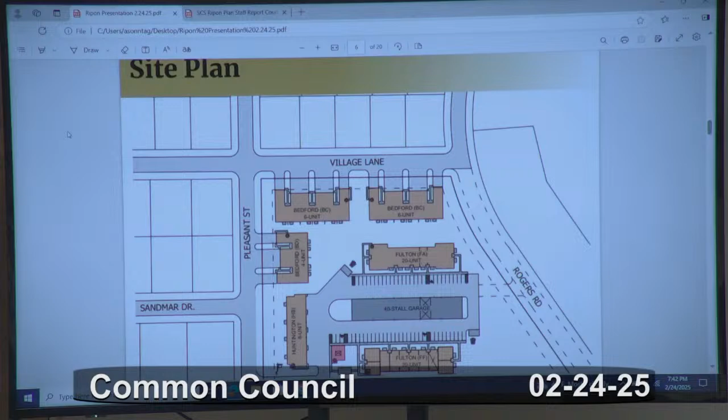To go a little bit more in depth into our site layout, as Courtney stated, we have 3 different building types on the site. Along the public streets, we have our 1-story Bedford building. These buildings have individual driveway access, and each unit will have individual rollout trash services. Our primary entrance to our other multifamily buildings is to the south of our site on Pleasant Street.

As you drive in, you're first greeted with our property management office, which our on-site leasing personnel will be working out of. This office is where tenants can access their mail, and we have included a community patio for tenants to use to the south of that building. Driving into our site to the west is our 2-story Huntington building. As you drive further along, you can see we have 2 of our 2-story Fulton buildings with their designated detached parking stalls in the middle. Our site has been specifically designed to consider snow removal, garbage pickup, and mail delivery.

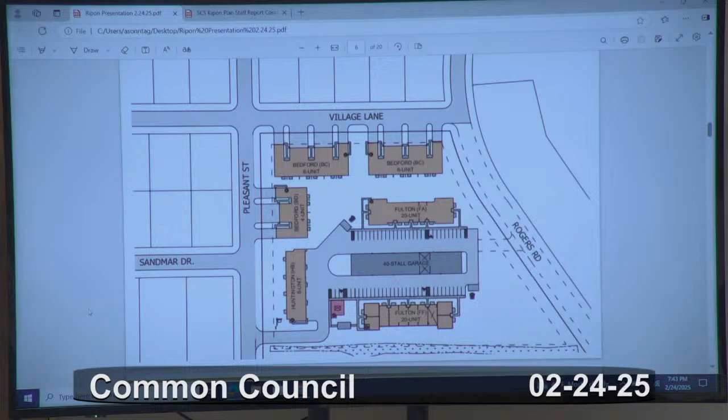Here's a bird's eye rendering of our site. Keep in mind that these renderings are not reflective of our proposed landscaping plan, but these are an accurate representation of our site layout and our building materials that we've selected.

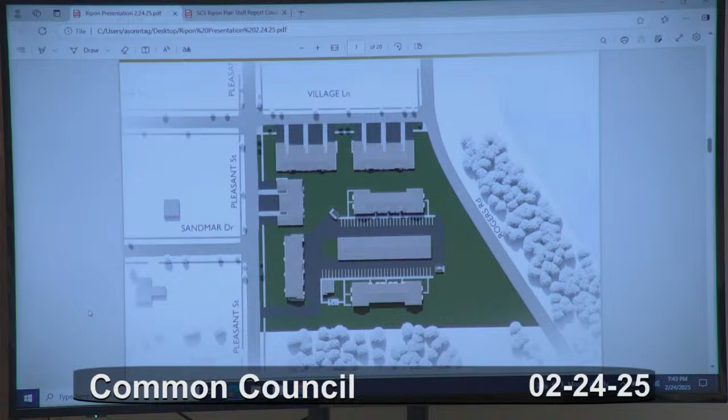Do you want to speak a little more? My understanding is, speaking of landscaping, that there's some more landscaping that makes it look a little bit classier from the road. Do you want to speak to that?

Yeah, we've submitted a landscaping plan, and I believe it's within the packet, but I'll touch on it more later in the presentation. We've included a whole bunch of different types of trees, and we used R3 point values as a baseline to work from, trying to get as many trees and shrubs on the site as possible.

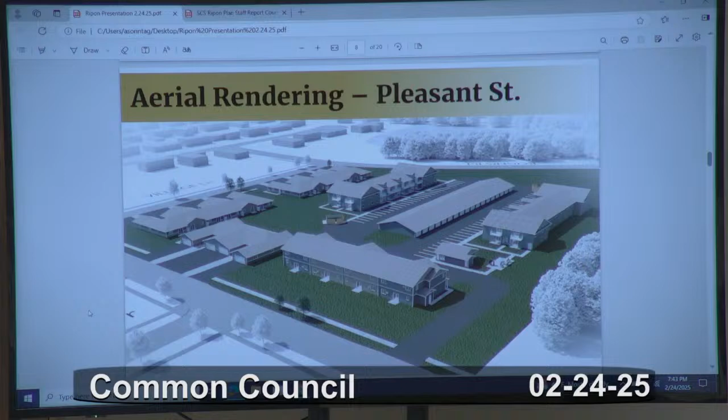Thanks. And then here's a bird's eye rendering from Pleasant Street looking into the site, and below that, here's an aerial view from the intersection of Pleasant Street and Village Lane.

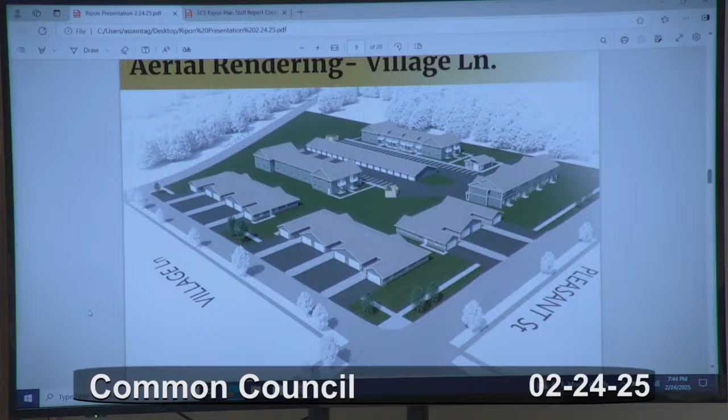And then, as previously mentioned, we've included a community patio area on the site specifically for tenants to use. This amenity has been very popular on some of our previous sites.

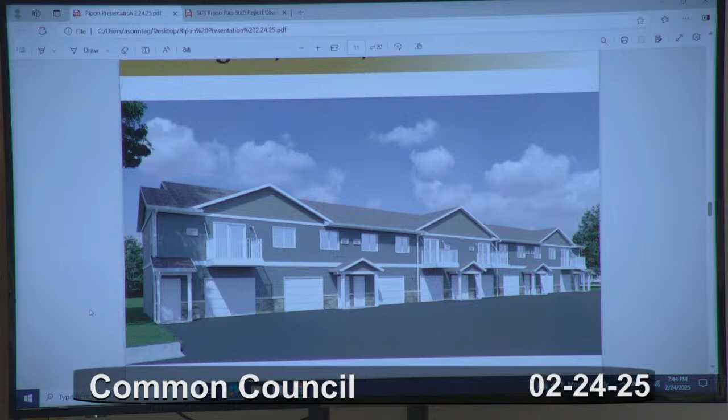To go a little more in depth on the specific buildings we've selected for this site, this is our Huntington building. We have one of these. It's 2 stories tall with a total of 8 units, all 2 bedrooms. This and all of our units on site include private entrances and in-unit laundry, but these units also include stainless steel appliances, an attached single-car garage, and a variety of floor plans, including upper units and townhome style units.

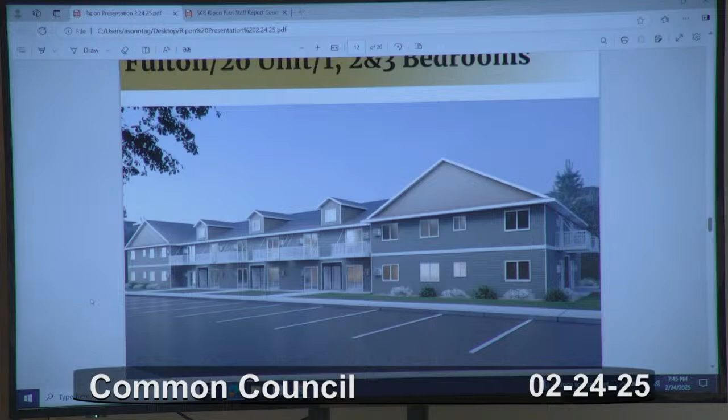This is our Fulton building. We have 2 of these on site. It's 2 stories tall with 20 units ranging from 1, 2, and 3 bedrooms. These units have single-story living, so you're either on the first or second story. Each unit includes its own balcony or patio area, and these units are offered at a lower price point compared to the other buildings because they have a detached single-car garage instead of attached.

Our leasing teams are highly experienced and professionally trained, so all rental applicants go through a comprehensive screening process, offering peace of mind that your neighbors went through the same income, background, and credit review process that you did. SCS also offers many online conveniences, which are very popular these days, such as virtual tours, online payments, and maintenance requests.

Thank you again for allowing us to share the proposed SES Ripon project with you tonight. The housing development would be a perfect addition to your thriving community. No matter what stage of life you're in, we would have the right apartment for you. With a vacancy rate of under 1%, we are confident in the demand for housing in Ripon and are excited for the opportunity to be a part of the solution. We're here to answer any questions that you may have. Thank you.

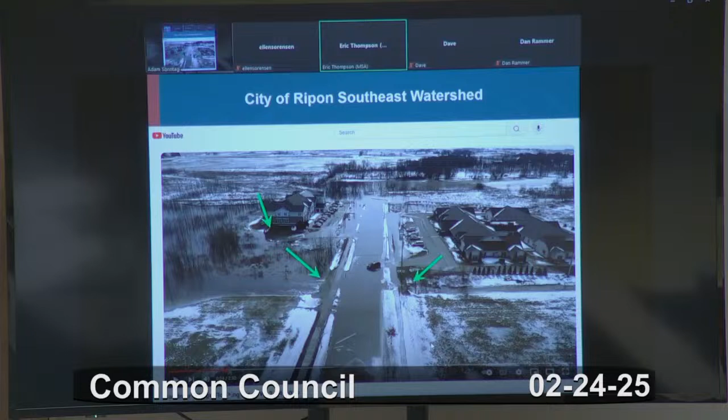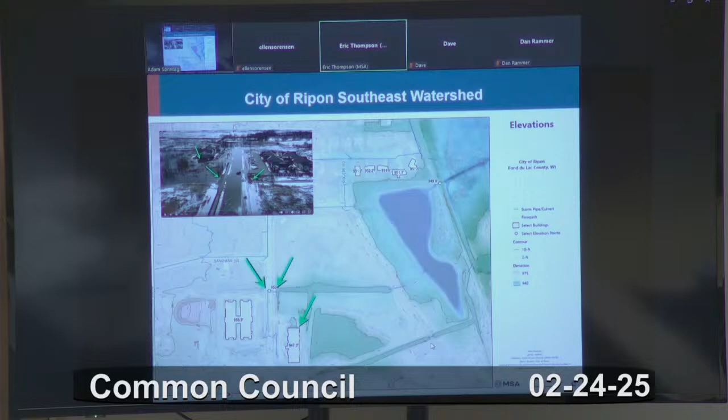Carrying it back to this colored map, this is the culvert going underneath Pleasant Street, and here is the underground parking that looked like it was flooded. The cul-de-sac bulb is right down here, if you can see my mouse moving around, and you can see the little blue line here, which kind of indicates a flow path. That is kind of where some of the troublesome areas were originating.

And here are those troublesome areas. This down here in the corner is the building on the east side of Pleasant Street at the cul-de-sac. Off the image is that underground parking that was flooded out. And what I'm pointing out with the arrows here is sort of the future extension of Ringstad Road, and you can see that the water here is quite wide.

You can see the black area that I'm tracing is quite wide versus the black area down here is quite narrow. So there's some sort of an obstruction here, whether the culvert is blocked or just simply undersized. There's quite a bit of what they call head here, and that's causing the water to build up, and it's actually coming around the corner.

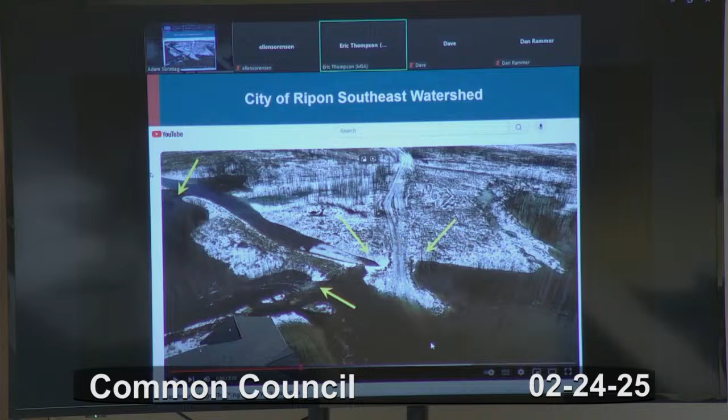A little bit is spilling down here, and a lot is spilling down here. And again, this is off of the raised up part of this development. And then over here, I'm just kind of showing how this area has become sort of a quiescent pool, so to speak, and it spills back into the channel. This is the bypass channel that eventually goes around the south and east side of the Sandmar Pond.

So kind of getting our bearings again, this is that same image, and I've just added the yellow arrows. So here is that culvert or extension of Ringstad Road that doesn't have adequate capacity. Here is where it flows around, and I'm kind of drawing attention to these contours here which don't come together. That indicates that there's a valley through there, however deep it is, and that's what's spilling down into this low area.

And then right here is another sort of a valley. In fact, they call it a saddle point because it looks like a cowboy saddle or a horse saddle, and it can come back into the channel right there.

So here's another view, and this has obviously got the pond in the background. And here is the backhoe that was removing that culvert that I said earlier on. I'd highlighted it with that purple arrow that may or may not have been removed, but what clearly was an obstruction. And you can see the water is now flowing down the slope and getting into Sandmar Pond.

Unfortunately, the angle of this photo is difficult to make too much in the way of interpretation, but you can see that the water has come up to about the edge of trees here. And roughly speaking, I estimate that at about elevation 945 or 946.

The 100-year flood elevation for the pond, at least the way it was designed, it's not really clearly identified in the 2011 study, but piecing together some of the calculations that were included in the report, I'm estimating that the flood elevation in there is about 946.2. So again, if this water elevation is somewhere in the 945 to 946 range, it's getting very close to the 100-year flood elevation that was identified for the pond.

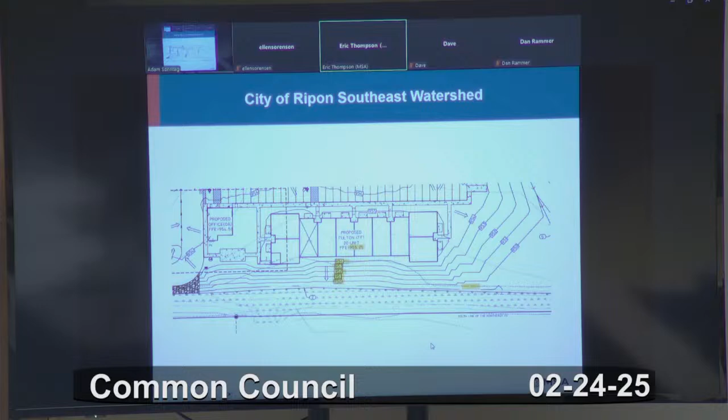I'm going to zoom in here real briefly. Again, here's the drainage ditch, the culvert's over here, Pleasant Street is over here, and you can see that the existing contours down here are about 950. This is a 951 contour, and 952 sits up here a little bit higher, and that's where the water would flood today if we had that same March 2019 event.

But they're actually raising the site quite a bit, putting it up at about 954 in terms of the elevation you'd be if you walked around the side of the building, and it's going to be elevated up to 955.25. So it's going to be well above the flood elevation, not to mention well above the overflow point of the railroad tracks. So one of the things we look at from an engineering perspective—I know there's all sorts of components to a development like this, including traffic and aesthetics and things like that.

But from an engineering perspective, one of the things we look at really closely is how it's going to affect the regional system in terms of generating more runoff, changing how flood elevations will occur, and then of course, is the site safe from itself, so to speak.

And so you heard that the development team from SES Swiderski are responding to some comments we made about improving drainage within the site to make sure that they're not going to be at increased flood risk.

The site itself fits into the original 2007 development plan. Obviously the development hasn't built out the way it was anticipated at the time, but a lot of times the way these developments are accounted for is a certain development density, and as long as they stay below that density—defined as pavement or building footprint, what we call impervious surfaces—as long as they stay underneath the maximum allowed, and even with this development they're far underneath what was originally planned, it should not have any negative impacts on regional stormwater.

Steve: On your slide where you have the fill for the buildings—yeah, this one right here, right there in front of us—don't you have to wait so many years before you can build something on a site like that if you fill something that high?

I'm not able to comment on that. My particular expertise is in stormwater and water resources and large earthwork projects like this. Whether massive is the right word or not, but large earthwork projects like this is something that perhaps Dan Rammer, also on the call, could comment on, or maybe someone with a little bit more experience in that aspect of the project.

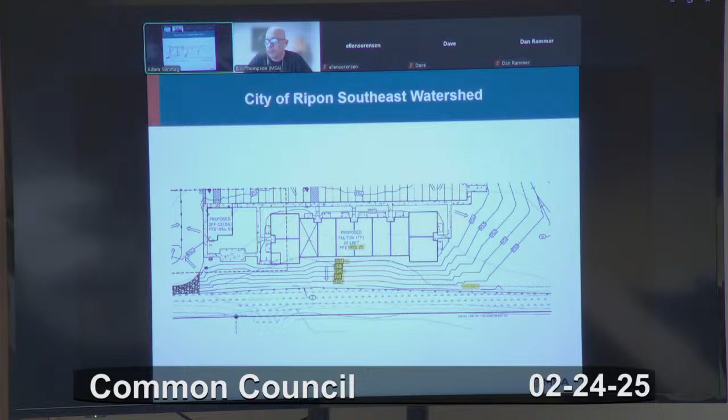Yeah, I can speak to that a little bit. Through our geotechnical investigation, we did identify this as a historic fill site. So essentially when they mass graded it to make everything level, they put a lot of topsoil in this area.

It must have been on the lower end, flowing that way. So we're actually going to have to over-excavate quite a bit. In some cases, take up 15 feet of the soil where the building's going and replace it with structural fill. Typically they'll do that in lifts—put 3 feet down, compact it, put another 3 feet down, compact it. So this is just where the buildings are going to sit.

Overall, if it's a green space, they don't require that kind of subsoil attention, but for the buildings themselves, yeah. It's not normal in some cases, but typically you want the buildings on native soil, and we have to dig down quite a bit to find that native soil on a lot of these buildings. So most of these will be on engineered fill, granular soils—all the buildings. It'll just be the engineer specifications on compaction densities and testing from the geotechnical experts.

The only reason I brought that up is generally if you build on a site, on the 7th year, everything sinks around a building. We see a lot of buildings that just get natural settlement—I'm curious about that, because even if you hurry up and fill something and use what they call a sheep's foot to compress it, it's still not stable ground.

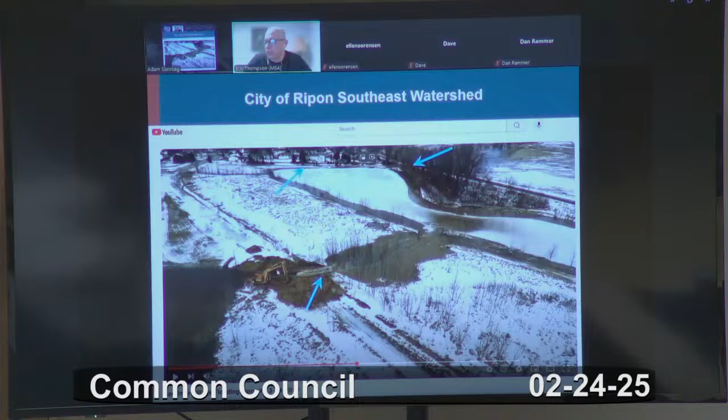But where this backhoe is parked is right here. The images show there was another blockage coming down the cul-de-sac, coming through on the southeast corner here, and wrapping around a little bit. Yeah, the blockage to the south is the one I was referring to.

Yep, that's right. Jolene, a question about culverts being plugged or blocked—whose responsibility is it to check that? And could that be something the city takes on every spring in high-risk areas to check? If we're hearing that a plug doesn't seem like a big deal, it shouldn't stop a whole project—it seems fixable. Could that be part of a maintenance plan?

Yeah, so I think there's a couple things going on with the continued development of this site. You have different phases, right? The original installation of things that were likely undersized was in 2011. After there were some negative outcomes from that design, improvements were made. Then in 2018, 19, we learned more and engaged Rick Reed, the developer, about the reason for some of those things and how things were installed in that area. That led to lawsuits with the contractor over not installing things and not maintaining them properly.

So as this evolves, generally we've made other recommendations as we review the site, including taking the most immediate drainage way abutting the site to the south and upsizing it where there was an issue in 2019—removing a culvert there, providing more floodwater and stormwater conveyance to the pond from this site and the development as a whole. The city has also talked with Rick Reed about acquiring the pond. The pond is currently owned by the developer, and part of the covenants and HOA will require property owners to maintain it in the future. The city has talked about that.

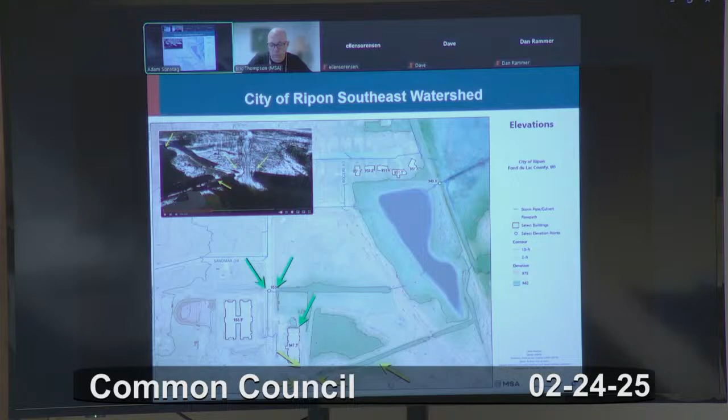And then it goes on to talk about the conveyance of water to the 100-year calculation on the site, and the DNR NOI - the DNR has issued their permitting for the site. Beyond that, we have the easement, and we are committing to repeat reviews for future development of the site.

Obviously there are storm events that can happen, and anything can flood. It's not like in March of 2019 this was the only area that flooded in the city - there were areas all around the city that saw significant water. So we are asking that SCS design a little bit heftier of a system to accommodate that, and they have agreed to do that.

So that was sort of the motion at the Plan Commission, was to approve it contingent upon that, and they have agreed to do that. They have not had five days or so to be able to work their plans. So the recommendation would be, if you're considering and concerned about that, is to just approve it contingent upon them submitting plans that are adequately reviewed and approved by, say, MSA again, that meet the stormwater requirements that were proposed in the memo.

The rest of these things can be addressed as part of the project. And the TID that we have talked about developing with this project - because absent of this project, the intention would not be to really do anything here, right? Because the existing TIF district is past its expenditure period and never had the funds to assist with this.